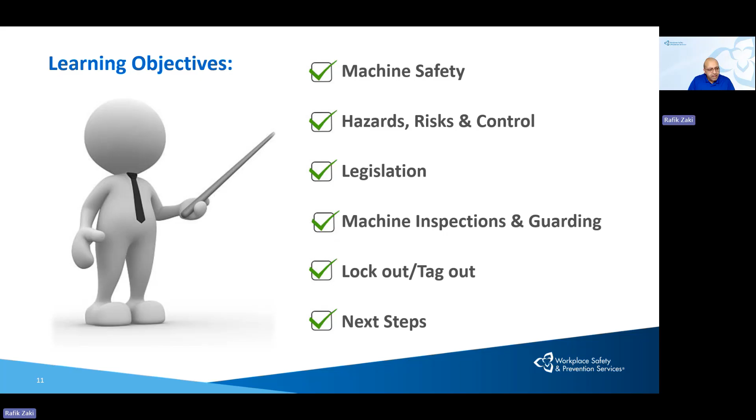We're also going to discuss lockout, tagout. What's the difference between guarding and lockout, tagout, and when we do this and when we do that, and what are the next steps for you as a supervisor. So these are the objectives for today that we're going to discuss.

So let's start with machine safety. Why is machine safety important? Definitely safety is important because it can cause injuries or fatalities for workers that work on these machines. We see different types of injuries, from fatalities on machines up to major injuries and minor injuries. Every injury has different consequences on the workers.

That's why when we talk about machines, we ask: what could happen if? We usually ask this question to ourselves. So you, as a supervisor, when you talk to a worker and you have a machine with moving parts or hazards, you ask the worker: what if you put your hand here? What could happen? Probably it's a very slow machine and nothing could happen. Or probably it's a huge machine with a huge hazard, huge rollers turning around, and it can pull the worker in. So we usually ask this question, what could happen, and this risk is different from machine to machine.

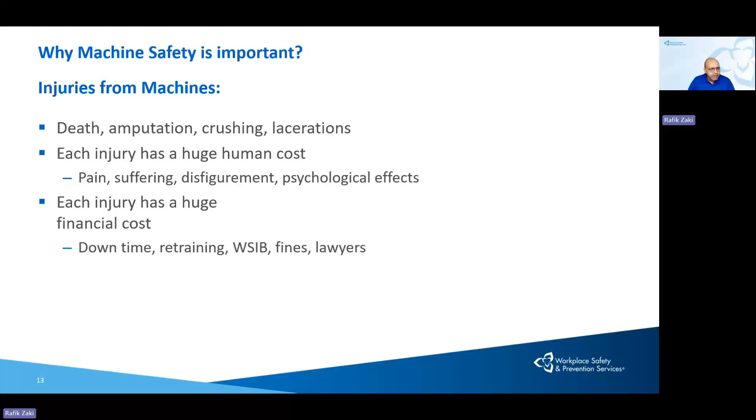What about lockout, tagout? During maintaining the machine, during repairing the machine, troubleshooting the machine, usually lockout, tagout is expected. Why do we need to lock out, tag out the machine? To make sure that the machine parts, or the machine, will not operate during maintenance.

So these are kinds of causes: during operation, during maintenance, during repair, sometimes due to inexperienced workers. You have new employees who are not experienced with the machine, or maybe students or fresh graduates. Sometimes it's due to a worker who is very experienced with the machine. Statistics sometimes show that accidents most often happen with workers who are not experienced, who are fresh graduates or new, or with very experienced people who have worked with this machine for many years and have such confidence that nothing happened before, so nothing is going to happen. So these are the kinds of primary causes for injuries that happen on machines.

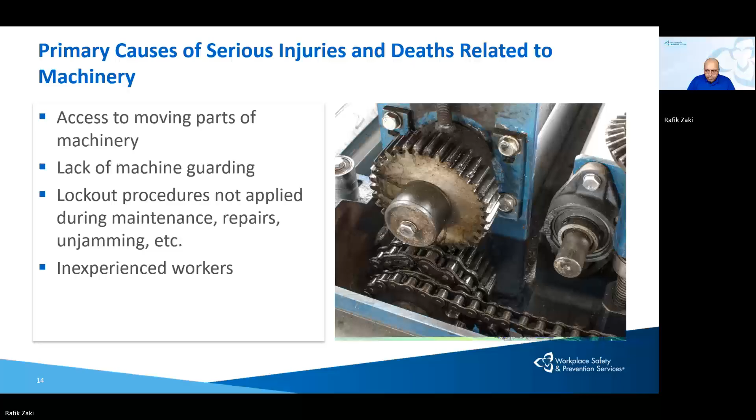All right, what assumptions do we see in workplaces that sometimes lead to an injury? Let's look at some of these assumptions. Give me a thumbs up when you hear this statement before.

No one would ever do this. Anybody heard this before? I see some thumbs up here. Doesn't make sense, but we hear this a lot. We have something and who's gonna do this? People see there are moving parts here and there is a hazard there. Who's gonna put their hands here, right?

What else? It has been like that for years and nothing happened. Okay, I see many thumbs up here. Nothing happened. I'm working on this machine for 20 years and nothing happened. Why? Sometimes they make this statement as a judgment on whether this is risky or not. So sometimes when we sit with customers and do risk assessment, they say no, we're not going to evaluate this as high risk, it's been working like this for 20 years and nothing happened.

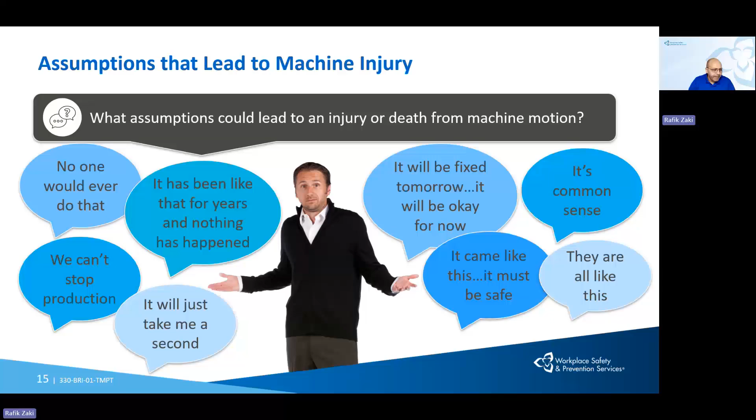They are all like this. So all of these are assumptions that we hear usually after we have accidents or have near misses or something like this. So we actually don't go through this, and usually we proceed with the law and the act and the regulations requirements.

We're gonna jump now to this wording. This is very important, not on machine guarding only, it is for any kind of hazards. So ergo hazard, hygiene hazard, slip, trips, falls, any kind of hazards or risks, we have three important words. What are these three important words? Hazard, risk, and control. What's the difference between hazard and risk?

If you would like to write something on the chat, what do you think is the difference between hazard and risk? Any idea? Just throw some wording. Yes? Yeah, exactly. Yeah, thank you. Exactly. This is all valid answers.

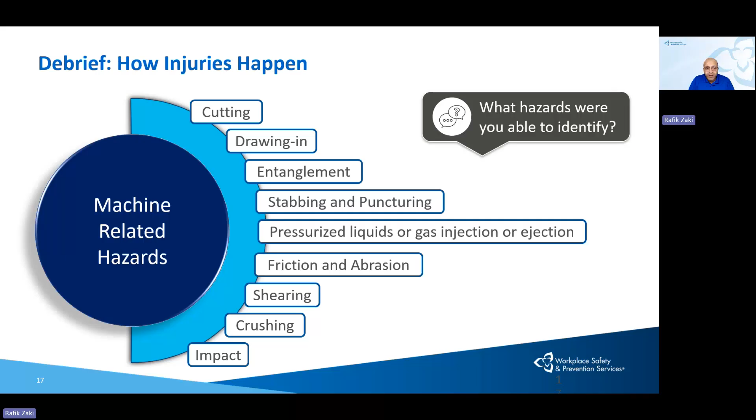But what else? We have also non-mechanical hazards, something like a machine using chemicals or flammable material, explosions could happen, airborne substance, heat, noise, vibration, radiation, biological contamination. All of these are not mechanical or not moving-parts hazards that could be on the machine.

If we have an ergonomic issue, like my worker or operator standing all day doing repetitive movement, or carrying heavy boxes, lifting, ergo stuff, all of these are slip, trips, falls around the machine.

If I have slip trips falls, if I have a forklift working around the machine, and this forklift can hit the workers because it's a tiny space, something like this. Fire, explosions, pressure. If I have live cables on the floor and liquids or water around the machine on the floor, all of these are kinds of hazards.

So what does that mean for you as a supervisor? When you look at the machine and the workers working on it, do you look at this and say, what could happen if? This is very important, to look at the hazard zone or working area and identify the mechanical and non-mechanical hazards around the machine. So these are the kinds of hazards that could come from a machine.

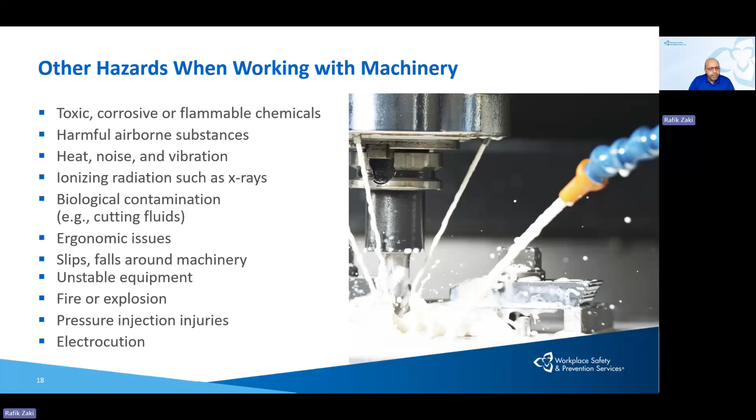Okay, but what about risk? Usually we say risk or risk assessment because, as you said on the chat, it is quantifiable, meaning we can measure it. We have a process about risk assessment called RACE: recognize, assess, control, evaluate.

So what we do first is recognize the hazard. What is the hazard we have on this machine? Then we begin to assess the risk, to measure the risk. How we measure the risk, we're gonna see. Why? Because we want to see the risk level, and based on this risk level, we begin to put the control or recommend the control in place.

And as you said on the chat as well, some people said remove risk, right? Remove risk means we eliminate the risk or substitute the source of the hazard or put engineering controls in place. So the level of control here comes from the risk level.

And then we evaluate the effectiveness. This is very important because sometimes we put the control in place and we still see there is still a hazard or risk in place. So we need to evaluate the effectiveness of the controls that we used. Okay? So: recognize, assess, control, evaluate.

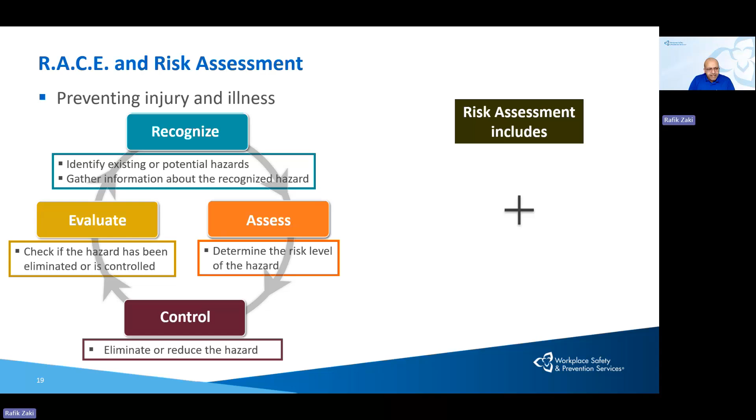When we assess machine guarding, we have a concept called MAC. MAC means if we have moving parts and we have access, we're gonna have consequences. So this is the first question when you do risk assessment: do I have moving parts? The worker has access to these moving parts. What are the consequences that could happen from this access?

Sometimes we say, oh, I cannot do guarding here because the worker needs access. But this is not the end of the story, because for every single machine we can suggest a guard to protect the worker without being an obstacle for the worker to do their jobs. We're gonna talk about this, but this is the concept we use.

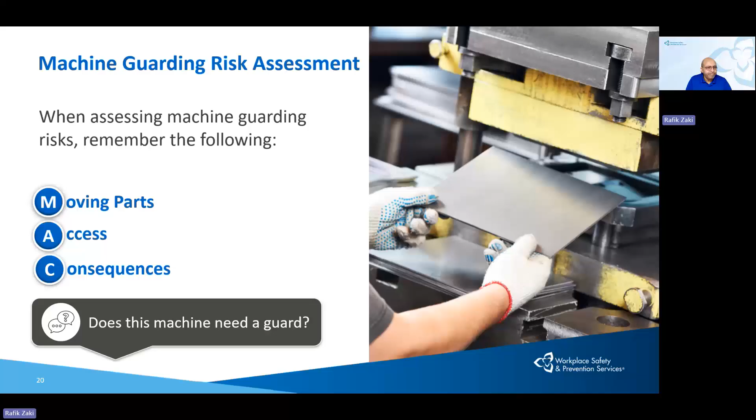How do we do risk assessment and how do we measure the risk? We measure the risk by using some parameters. The main parameter is the severity of harm.

What could happen if I put my hand here? Is it gonna cause a fatality to me, or is it gonna crush my hand, or is it just gonna cause a paper cut for me? No, it's very slow, it cannot do something like this. So this is the question: what is the severity?

And what is the likelihood of the harm? The likelihood comes from two things: the probability of something happening, and can I avoid this from happening or not?

Once we ask ourselves these questions, definitely you as a supervisor, when you talk to your worker, you begin to measure the risk. What is the severity? And for all these answers, this input, the best people to answer it are definitely the workers, because the worker reporting to you is the one standing in front of the machine all day and exposed to this.

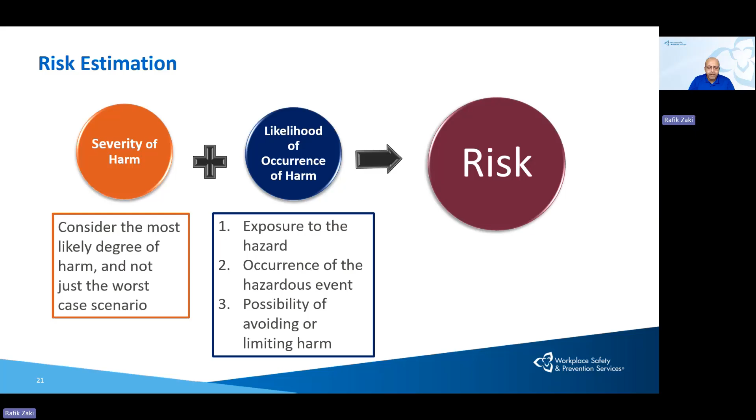Once we measure this, it gives us the risk level. This is one of the matrices that we use to measure the risk. So S is the severity level here. Exposure to hazard: E0 is prevented, E1 is low exposure, E2 is high exposure, and the third parameter is avoidance of the hazard.

Can I avoid this hazard or not? Can I pull my hand away if something happened or not? Can I avoid being in this area when the machine is working or not? So we have A1, A2, A3, and this is the matrix that gives us the risk level.

This is one of the matrices that we use in risk assessment, and this matrix is specifically used for machine guarding. It's taken from an ANSI standard—American National Standard Institute. We have a similar one in the CSA standard, which stands for Canadian Standard Association.

We're going to talk about CSA and ANSI in the coming slides. But this is one of the matrices we use when we measure the risk. Why do we measure the risk? We measure the risk here to begin to talk about the control.

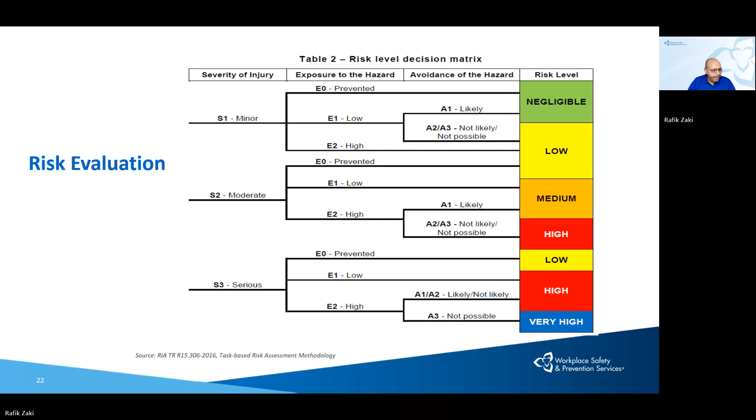Now we're gonna jump into the third word, which is control. We talked about hazard, we talked about risk, we talked about risk assessment. Now we talk about control. We have something called hierarchy of control. What does it mean? It means we need to go into this order when we talk about hazard. So if we have a hazard and we have a risk, then we're gonna begin to talk about control.

If you hear your worker, as a supervisor, telling you, yes, I have this hazard here and I have a risk and I put gloves or I put safety eyeglasses to protect my eyes, you're gonna say no, we have something called hierarchy of control. PPE comes number 6 here.

So let's talk from the start, from number 1. Did you try to eliminate the hazard from the source or not? Or did we think about substituting the hazard or not? I'm gonna give you a quick example for eliminate and substitute.

If you have a saw on your workplace and you're cutting pipes, and you see this saw has a lot of cutting hazards, let's think about eliminating the hazard. Let's think about talking to our supplier to send the pipes or tubes with the right lengths. Then I don't need to use it, so I eliminate the hazard from the source.

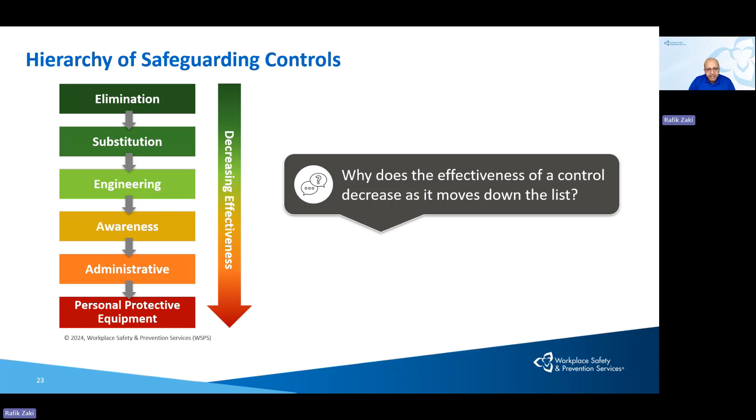Why do we call these high level and these low level? Because these are non-human controls. If I have a safety switch and I open the machine door, the machine will stop - I don't have, as a human, an input on the control level. But here, if I have an SOP, a standard operating procedure, if I have training, if I have PPE, I as a worker have the choice to go with them or not. So this is what we call hierarchy of control, and we look at the effectiveness that decreases down this list. We're gonna jump to legislation, which is the next one here.

This is okay. Yeah, I have a question.

Good question here: is preventive maintenance on a machine considered an engineering control or admin control? The technical part of the maintenance is engineering control. Implementing the maintenance on a frequent basis, having a program and procedure in place, that's admin control. I've gotten this question before. Preventive maintenance specifically has two parts: the technical part, which is engineering control, and the implementing part - the programs, the procedures, how frequent, auditing the programs for effectiveness - which is the admin control. Thank you, it's a good question.

All right, jumping to legislation. So now we talked about why machine safety is important, we talked about hazards, risks, and controls. Now we're going to jump into legislation and what the expectations are from the legislation.

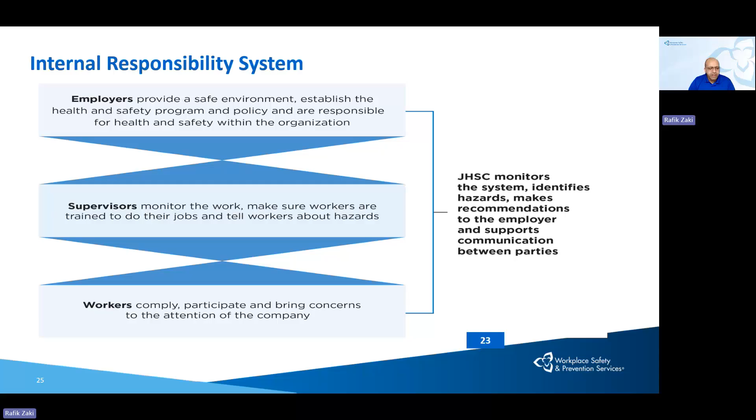Usually when you have a near miss, or something like this, or accidents, there is an investigation - the ministry or the inspector goes through this, sitting with the employer to see where the company stands on safety, sitting with supervisor and workers to see where the violation came from.

If we talk about the Green Book, or the Occupational Health and Safety Act, it has some sections - this is the act, with sections talking about responsibilities for employer, supervisor, and workers. Then we have regulations, and since we're talking about machine safety today, we're going to talk about Regulation 851, which is the regulation covering machine safety. Then we have a layer called standards - as you remember, we mentioned CSA, ANSI, ISO. These are the standards or guidelines that help us meet the requirements here.

So I'm going to give a very quick summary about this structure.

The act and the regulation here are law. It's mandatory, it's shall language. Shall language means it's black and white, okay? Standards here are the guidelines to meet the requirements of the act and regulations, okay? So I'm gonna give a quick example about this.

The act, for the employer, section 25 says the employer must provide a safe work environment, okay? Period, that's it. They didn't give more clarification, okay? Regulation 851 begins to go through this, telling you if you have exposed moving parts, you should put guarding in place, okay? Section 74 to 76 talks about if you have lockout, if you have maintenance or repairs, you have to do lockout, tag out, okay?

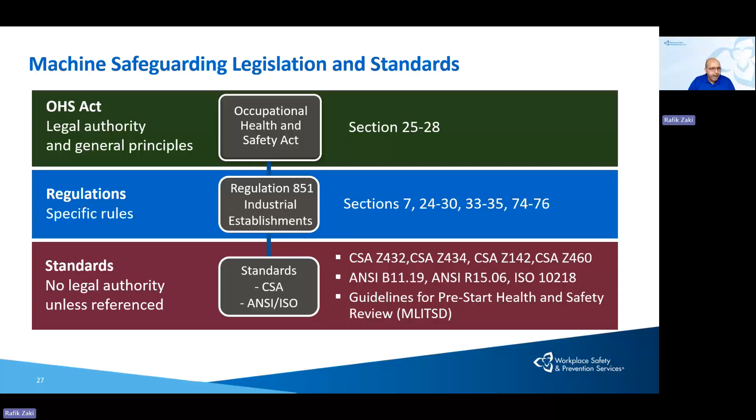All right. And we definitely have guidelines for pre-start health safety review, MLITSD, from the Ministry of Labor. So these are like a summary about the act. So these slides are gonna give you an idea about what I just mentioned now.

Section 25 and 26 from the Act talk about employer responsibilities. When we talk about employer responsibilities, what are the employer responsibilities here as per 25? And this is again talking generally, not machine guarding specifically, but definitely it's applicable for machine guarding. Provide and maintain safe equipment, material, protective devices. Ensure safe measures are followed. Provide information, instruction, and supervision.

Appoint competent supervisor. And we want to talk about competent supervisor - what does it mean, competent supervisor? Take every precaution reasonable in circumstances. This is 25-2H. 25-2H is a very important one. And please remember 25-2H, because you're going to see it also under supervisor responsibilities, and provide written instruction. Okay, so again, these are very important here.

Can you put in the chat your thinking about this statement? What does it mean, appoint competent supervisor? What does it mean, competent supervisor? What do you think?

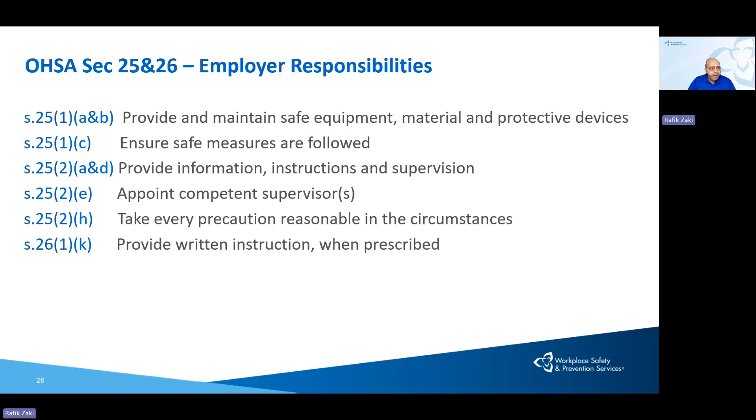Good question. So these are the responsibilities for the employer. Then we jump to section 27, talking about supervisor responsibilities. Supervisor responsibilities means you are the connection between the employer and workers. So as a competent supervisor, you ensure that your workers are safe.

You ensure that they have their PPE, that they are aware of the dangers and potential hazards, that they have their instructions and are trained. Again, this is the General Duty, 27(2)(c), that showed up on the employer side too - take every precaution reasonable in the circumstances. This is what we call the general duty clause. You can't say, 'where in the green book does it say I have to do this?' Once you notice there is a hazard and a risk, you are required to take every precaution reasonable in the circumstances.

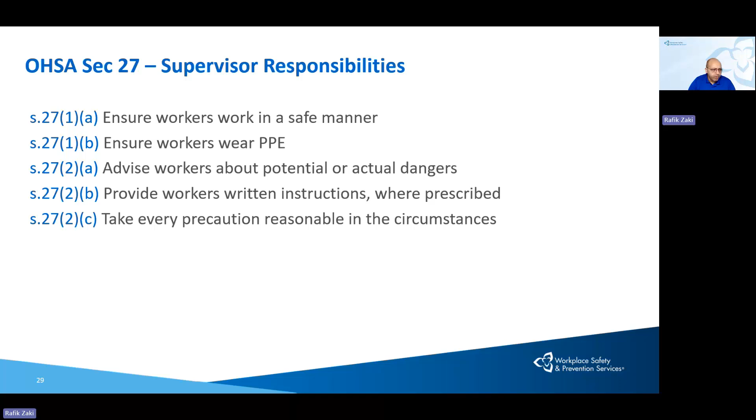This is what we call the due diligence of competency. Workers have responsibilities to work in compliance with the Act and regulations, to wear the equipment, the PPE, and to use the safety devices, to follow instructions, not to bypass any safety devices, to report hazards and violations, and not to remove any protective devices prescribed by the employer and supervisor, and not to operate in any way that endangers themselves.

As we know, workers have the right - and you as a supervisor are also a worker - they have the right to know, to participate, and to refuse unsafe work. I stress unsafe work. Don't refuse work, because when I ask this question, people say 'refuse work.' No, refuse unsafe work, not refuse work. So right to know what? Right to know about the process, how their machines work safely, what the hazards are on their machines, what the risks are, and what controls they should have to make sure they are safe.

And, you know, these are the fines and penalties - an individual now can get up to 500,000 fine, a corporation up to 2 million, and corporation directors or officers up to 1.5 million.

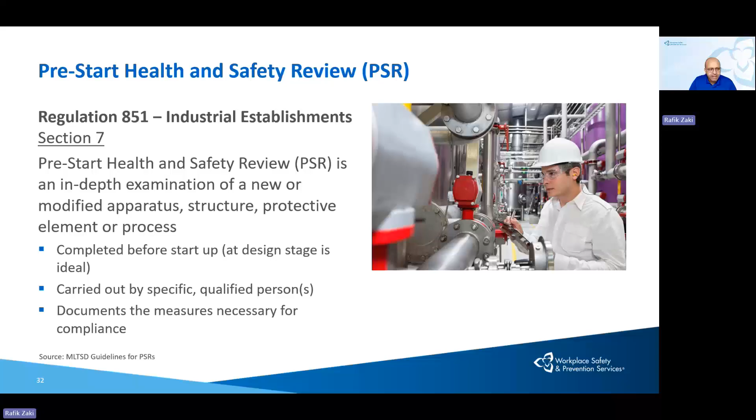Perfect, okay, so we're going to talk about machine guarding. Regulation 851 - we talked about the act, sections 25, 26, 27, 28. Now we're going to jump into regulation, some sections from regulation 851. We talked about section 7, covering pre-start health and safety review.

Section 24 talks about an exposed moving part that can cause injury must be guarded to prevent access to the moving part. For example, as you see here on the photo, a fixed or interlock guard. Anybody know what's on the photo here?

Just write in the chat, does anybody know what this is? Did you see this at your workplace? Do you have one of these? Yeah, safety gate interlock - yes, interlock.

It is an interlock. As you see here, if you open this door, it's going to open the circuit and stop the machine or whatever is behind this guard. If you have a robot or something, sometimes this interlock has a mechanical lock on it that prevents the door from opening when the machine is running. Other times there's no mechanical lock, and you can open it, but once you open it the machine stops immediately. Okay, this is section 24.

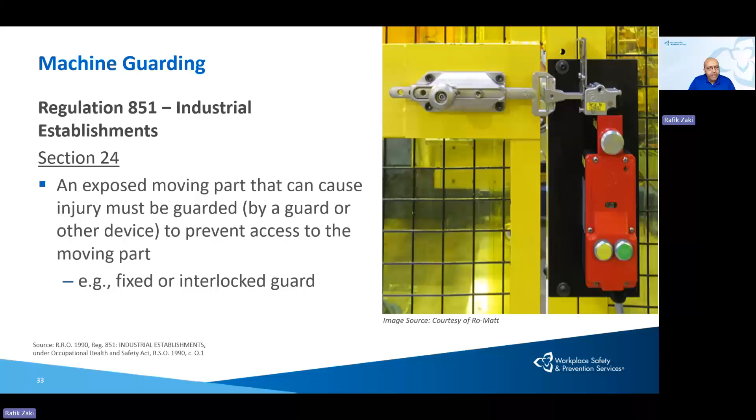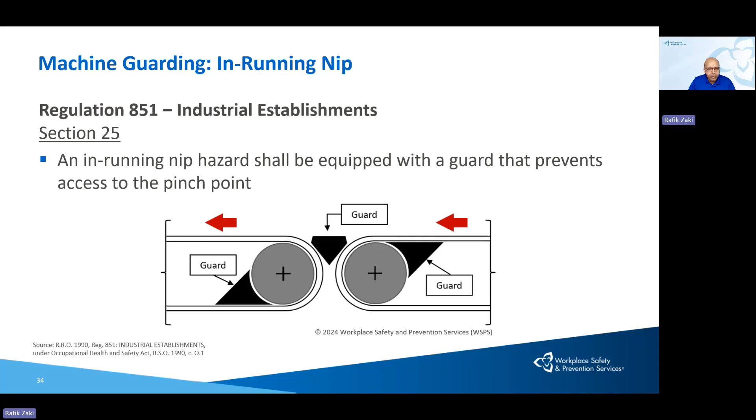What does section 25 talk about in regulation 851? In-running nips. So if you have an in-running nip, you need to put guarding in the rotation direction so there's no hands getting entangled or pinched there.

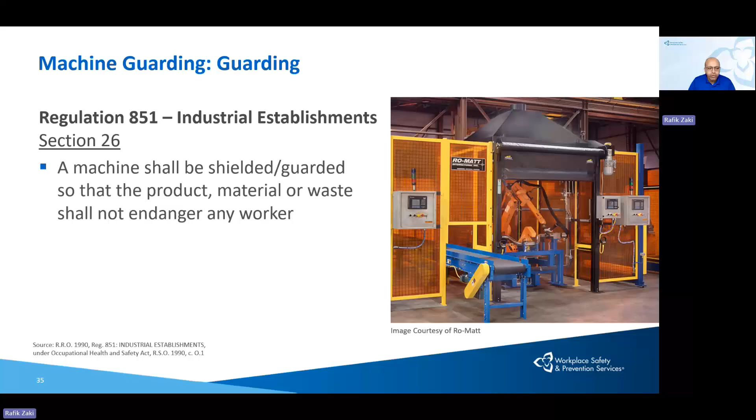Section 26 talks about projectiles and flying material or waste, like if you have welding, or if you have a robot and things can fly off it, you have to put guarding around to make sure it's not going to endanger the workers.

Section 27 talks about emergency stops, but it doesn't give all the details - it just says it has to be easily accessible and identified. Some questions we get: are these shrouds okay around the e-stop? These shrouds are okay now. In the old version of the standard, these shrouds shouldn't be there, but in the new standard they now allow these shrouds to make sure it's not pressed by mistake.

But these shrouds must be built in a way that they do not prevent the worker from pressing it with their palm, their hand, or sharp contact, or similar. So it has to be easily accessible. If I put these shrouds or guards around in a way that prevents the worker from pressing it in case of emergency, then these shrouds are not suitable. So this is section 27.

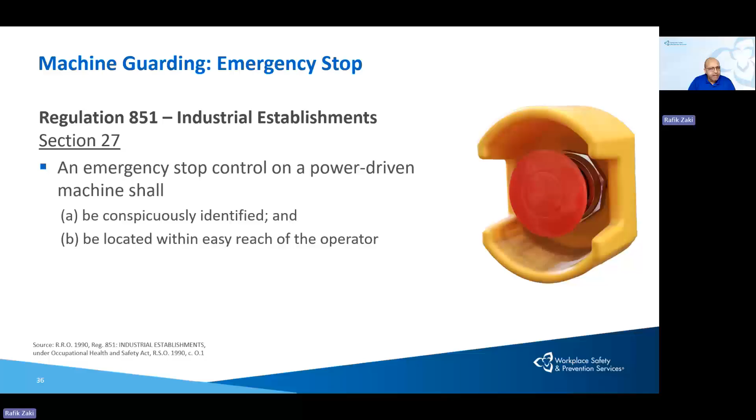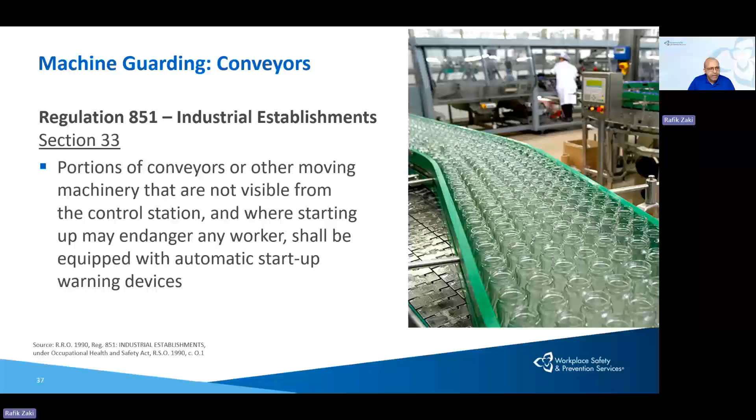Section 33 talks about portions of conveyors or other moving machinery that are not visible from the control station, and where starting up may endanger any worker, shall be equipped with an automatic startup warning device. This is section 33.

Sections 75 and 76 of the regulation talk about lockout tagout. So hazardous energy - if we have hazardous energy, that means it needs a lockout tagout and securing the stored energy as well.

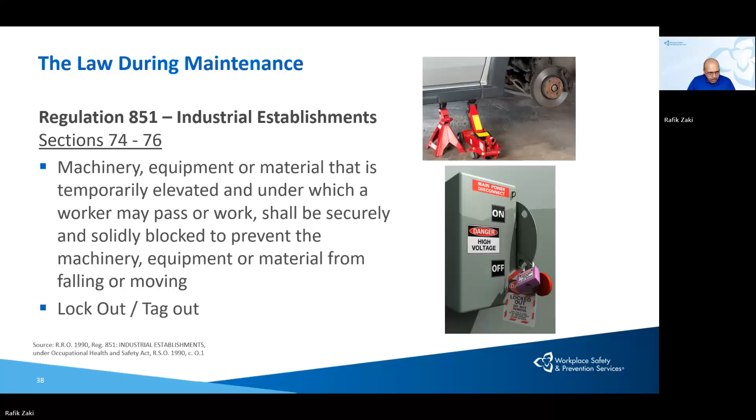All right, before I move to standards, I think we have questions here. Okay, if we take the guarding as an example, does it have to come with a machine?

To have the additional consideration - if we're talking about guarding, if you mean fixed guarding or fencing, this does not trigger a pre-start health safety review.

Now let's talk about guarding. If you're buying a machine with guarding, we consider that the machine builder built this guarding according to the standards and it meets the requirements. So as an end user, you need to look and assess if this guarding is built according to the requirements or not. But if you have fixed guarding, fencing, mesh, or panels, that does not trigger a PSR. PSR is only for cases with a safety device - electrical, a safety circuit, something electrical or electronic that stops the machine. Emergency stop and fixed guarding do not require a PSR, but you still need to do an assessment to make sure it's built and prevents the worker from accessing moving parts. We'll talk about this more in the coming slides.

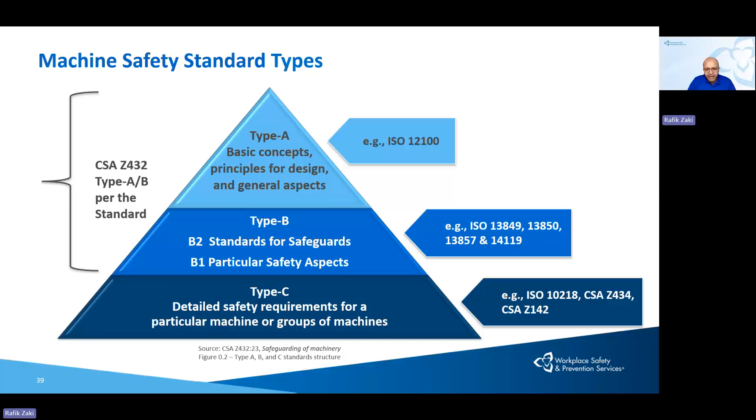Now we talked about the act and regulations. Now we're jumping to standards. Standards are the guidelines to meet the law requirements. I'm not going to go through this in detail, but as you see here, we have three types of standards. Type A is the generic one. So back to your question, we need to make sure the guarding is built according to one of these standards - CSA Z432 has guidelines on how high and how big the guarding should be, with a lot of details. Type B is a standard for safeguards. Type C is a machine-specific guard - for example, robots or presses - but Type A is for any machine.

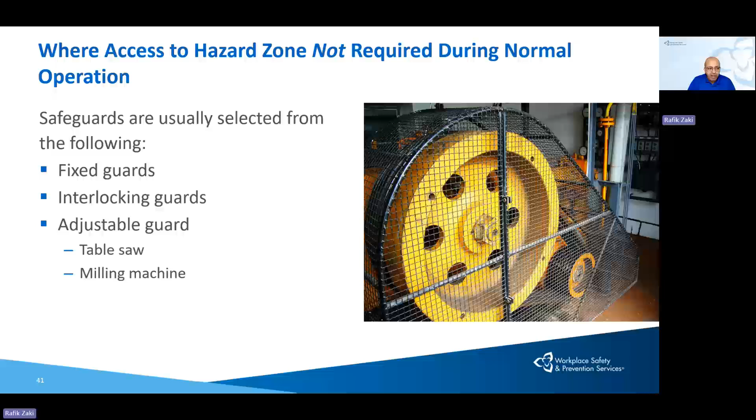We're going to talk about machine inspection and guarding. This is an example of what we call fixed guarding. Sometimes we have interlocking guarding, sometimes adjustable guarding. What does fixed guarding mean? It's a very important thing - it has to be permanent, meaning by welding or by fasteners that require tools.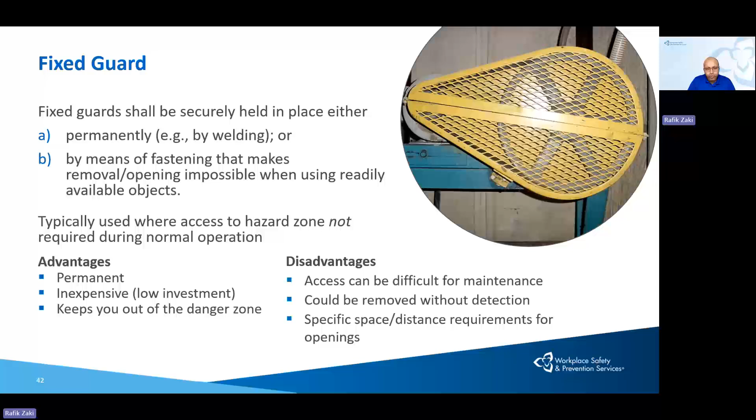What are the advantages? It is permanent, it is not expensive, it does not require a PSR. But the disadvantage is that every time you need access, you need to lock out the machine to disassemble this and do your work. This is one type of guarding.

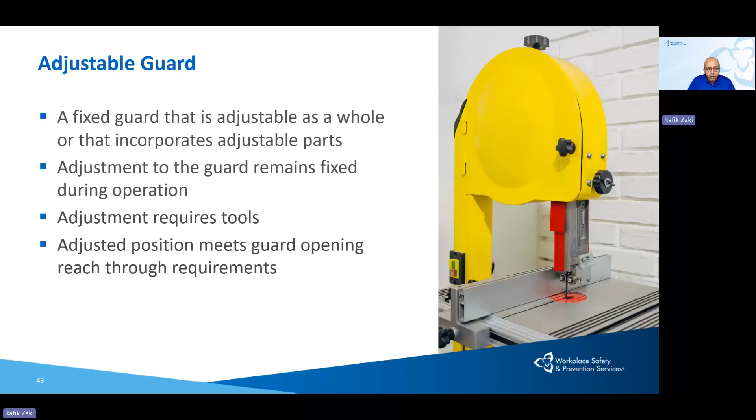Another type is adjustable guard - something like this, where you need to move the guard up and down around the blade to make sure it's covering the blade. So you're adjusting it using tools as well.

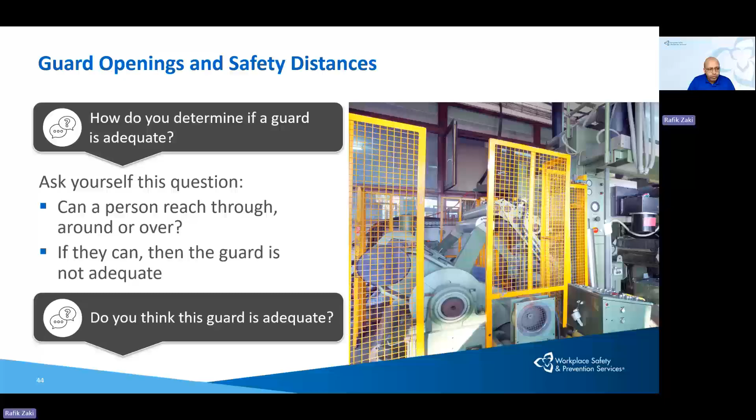Very important - if we're using fixed guarding, and this goes back to your question - the first question we ask is: can a person reach through, around, or over? If they can, then the guard is not adequate.

That takes us to a table in the CSA standard Z432, the machine guarding standard, that gives you the relation between the opening size and the horizontal distance to the hazard. It gives three options: round opening, square opening, or slotted opening, and what the opening size should be. I don't want to get too technical given the time, but this is a screenshot from the table in CSA Z432.

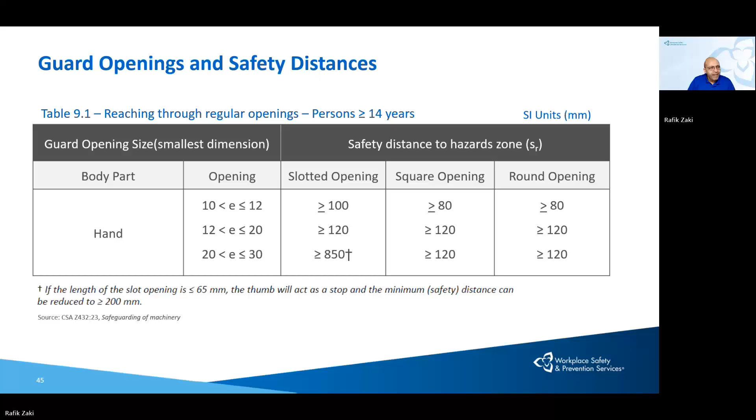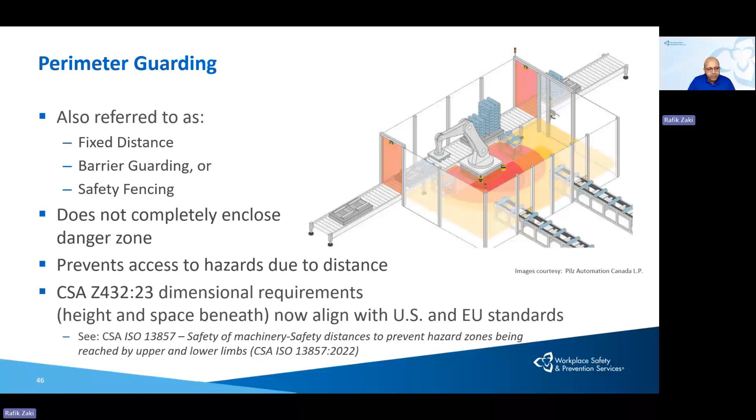What are these dimensional requirements? The height of this fence shouldn't be less than 55 inches or 1.4 meters, and the opening to the ground shouldn't exceed 7 inches. Again, all of these are from the standard. It's very important that you, as a supervisor, make sure that when you have fencing or perimeter guarding like this around machines, it's built according to the standard requirements.

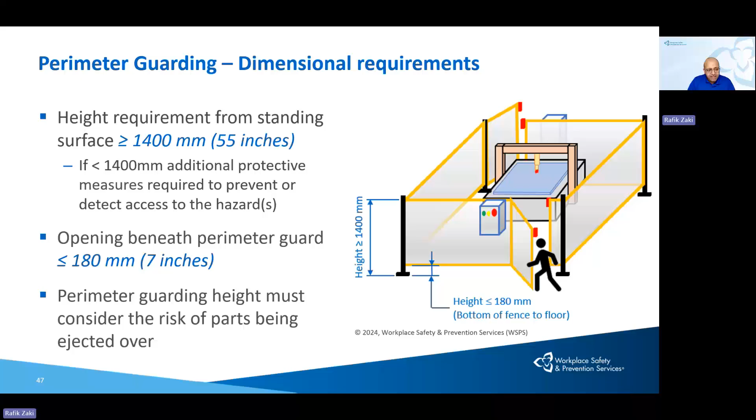That's why the CSA standard now included something called whole body access. Whole body access is two things: if the opening on the guarding permits the entire body to enter the safeguard space, and there are some areas within the safeguard space that can remain undetected. If this happens, that causes accidents, and the new standard now begins to put in place some measures to prevent this from happening.

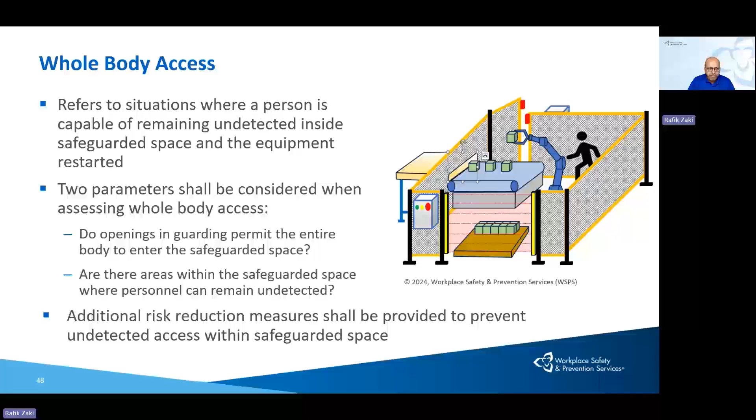Something like if I get inside through the light curtain, I have to blank the beam and put a lock so nobody can operate the machine while I'm inside. Or I put some sequential reset button inside so my colleague cannot reset the safety system from outside until I reset from inside, and so on. A lot of technical details I don't want to go through now, but if you want to keep this in mind, this is what we call whole body access.

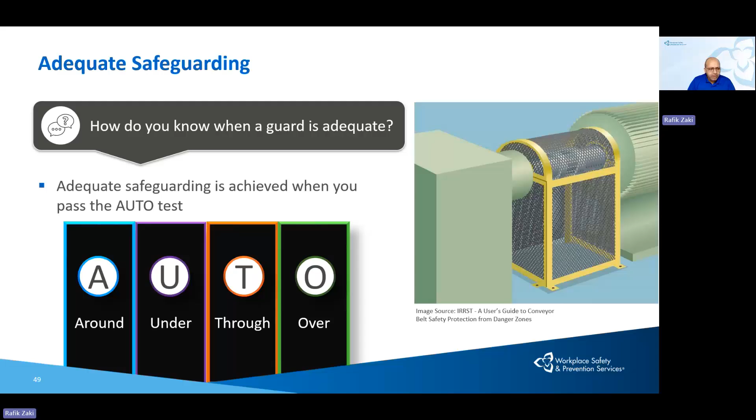Whole body access. All right. When we know that the guard is inadequate - if the worker can access around, under, through, or over and reach the hazard's motion, then my guard is inadequate. Please keep this in mind, we call this the auto principle: around, under, through, or over. This is about fixed guarding.

So what we talked about with fixed guarding is it has to be welded or use fasteners that require tools, and it has to have specific dimensions, specific openings to make sure that it's not allowing access.

Now we're going to talk about interlock guarding. What's interlock guarding? Interlock guarding means that this guarding has a specific switch. Sometimes this is a mechanical switch, like the ones I talked about. Sometimes it's a magnet switch or non-contact switch. Sometimes it's coded, uncoded - we have different types of safety interlock switches.

In this phase, it begins to trigger a PSR, because now we have a safety switch. So this is the safety interlock switch, and opening this guard interrupts the operation of the equipment, preventing access to the hazard.

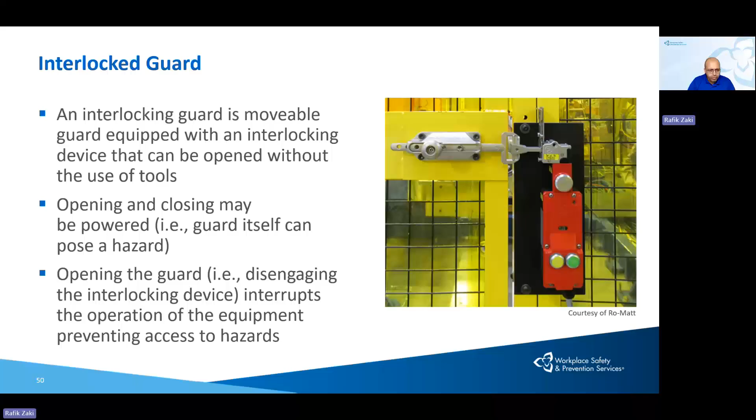Light curtain, sometimes we call it PSD, presence sensing device. Light curtain - again, once we interrupt the light curtain, the transmitter and receiver, the machine stops immediately. After you interrupt the light curtain, you need to go back to the panel and reset the safety function to restart the machine.

We have different types, and these different types are selected based on the risk level. The higher the risk, the higher the type we need to put in place. The only piece I want you to keep in consideration is that the distance of these light curtains from the hazard is specified by an equation that needs to be calculated based on the stopping time. So sometimes if the stopping time is very high, this light curtain needs to move further back to make sure that if I cut this light curtain, the machine is going to stop before I reach the motion.

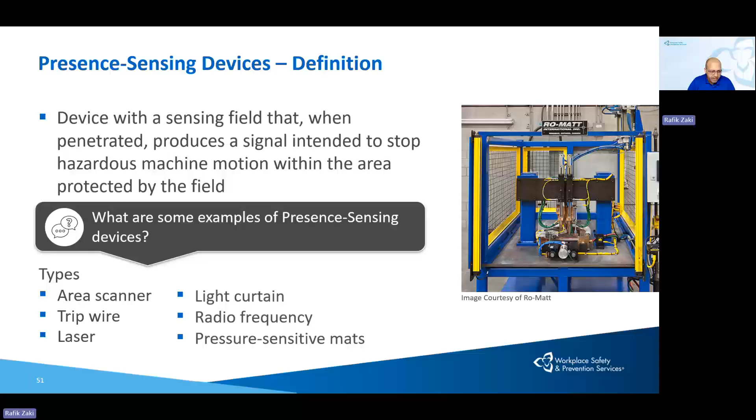Safety scanners are the same idea as light curtains, but the difference is the transmitter and receiver are built into the safety scanner. The good thing about this one is it's programmable, reprogrammable. Sometimes we program it in a way that we mark the floor - for example, if somebody comes into the yellow zone, the machine is going to slow down, but if somebody gets into the red zone, the machine is going to stop immediately. So this is the safety scanner, but again, this is a safety device that's still triggering a PSR.

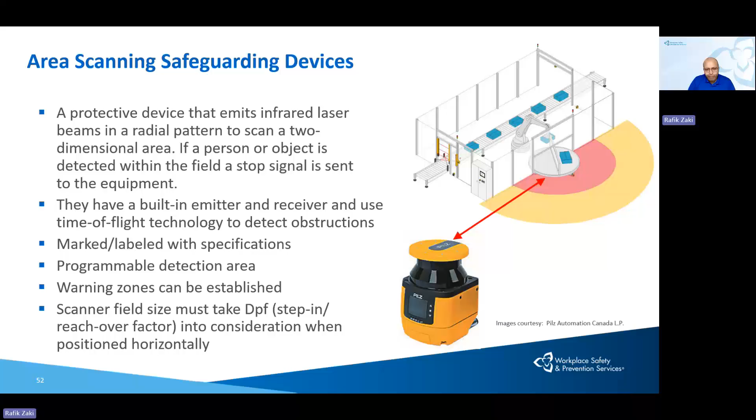So all of these are safety devices. Their level of protection exceeds the level of protection of an emergency stop. That's why we call this a safety device. The other one is the emergency stop, which is an emergency device.

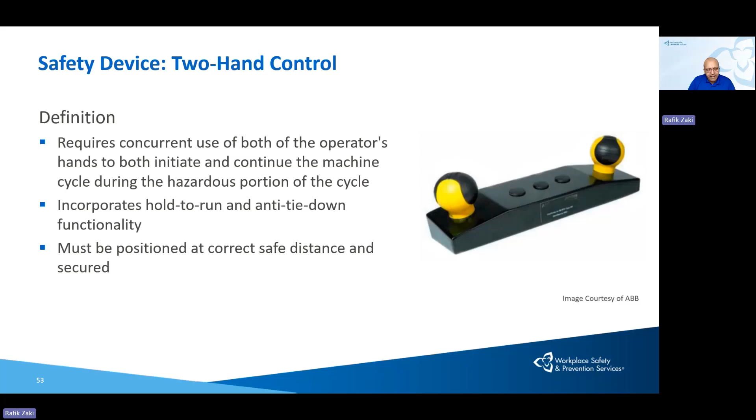Two-hand operator control - I don't know if anybody in the group here has two-hand operator control, but this kind of needs two hands to energize the machine, and this is the least we use because it protects the hands only and protects only the worker who's using it, but doesn't protect others as well.

So this is about machine guarding and the safeguarding that we're sometimes using. Now we're jumping to lockout tagout.

Lockout tagout is required if the machine is not in operation. So any machine phase or life phase other than operation, the expectation is lockout tagout. Sometimes we cannot do lockout tagout. We need power to do troubleshooting, or we need power to do something, like clearing a jam. I don't need to lock out, tag out.

This is another story, that we do risk assessment for these tasks. This is another session we can talk about later, or if you have questions, you can contact me about this.

But if we're not able to do lockout tagout, and we do something called minor service where I need power on it, we have to do a risk assessment, using the risk matrix I showed you, to make sure we have the right controls in place and meet the same risk reduction level as lockout tagout.

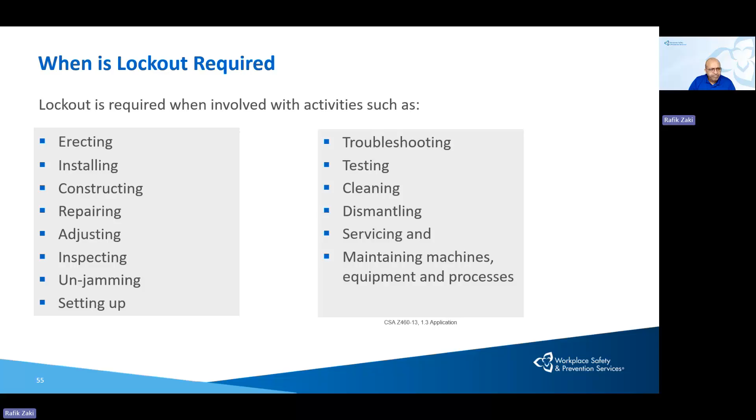These are the kinds of hazardous energy we make sure to control, so it doesn't hurt the worker during repair or maintenance. We have electrical, hydraulic, pneumatic, kinetic - kinetic means something keeps running after we disconnect the power - potential, like something hanging with potential energy, thermal energy, radiation, chemical, and so on.

So these are different energy forms. It's very important to know that when we talk about lockout tagout, we talk about two things: the source, how we isolate the source feeding the machine. For example, if I have electrical, I have a switch that's lockable, I can put a lock on it. If I have hydraulic, how do I secure the hydraulic power unit, secure the compressor, close the valve, and put a lock?

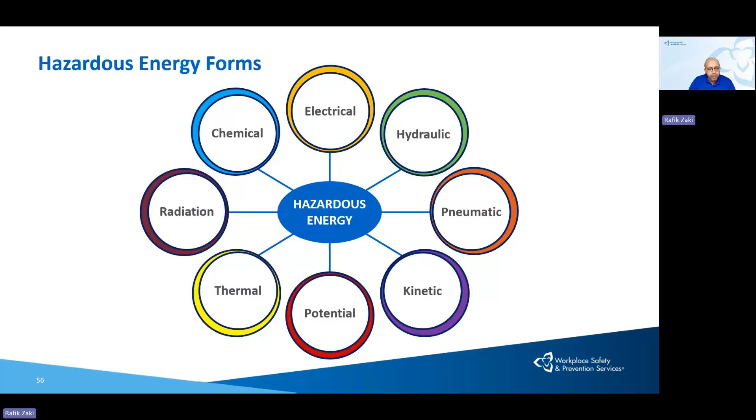The second piece that's very important to consider is stored energy. Keep in mind that when you cut the source to the machine, you still have stored energy inside. So capacitors - if we have any electricians here, you know capacitors store electrical energy. If you have hydraulic, what do the hoses and piping store? How do I release this stored energy to make sure it's not going to hurt the worker during their tasks? So these are things to look at when we do lockout tagout.

We have a standard for lockout tagout, CSA Z460, 2020 revision. The last revision from 2020 has 7 steps for lockout tagout. These are the steps we have to consider in our procedure: prepare for shutdown, shut down the equipment, isolate equipment, control stored energy - this is the one I just mentioned about stored energy.

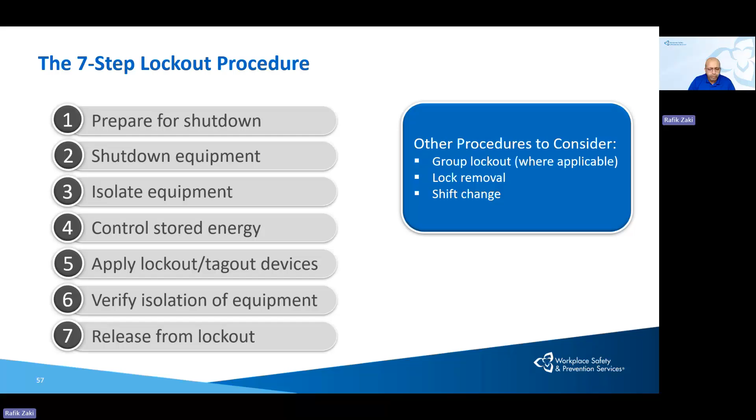Then apply the lockout tagout device, verify isolation of equipment - every step of the first five needs verification. So we verify, and at WSPS we help a lot of customers with these steps and with building placards specific to each machine, outlining the steps from 1 onward until bringing the machine to a zero energy state. I know a lot of our firms and customers are doing this.

All right, I think we still have about 10 minutes, so let's discuss what's next. What do you think? I know I threw a lot of information at you in a very short time, 90 minutes, but what does that mean for you as a supervisor?

When you think about this, what do you think you should do to protect your workers and your team from machines, hazards, and risks? Think about this - what tasks are you going to begin to look after, now that you've heard this? Are you going to observe the team and how they're working on machines?

Do you understand the hazards? Do you have risk assessments? Exactly, thank you for these comments - great comments. Do you have communications? Do you have your worker participation? Do you audit or monitor the process for your workers on machines? How do you engage your workers? These are all questions you may think about.

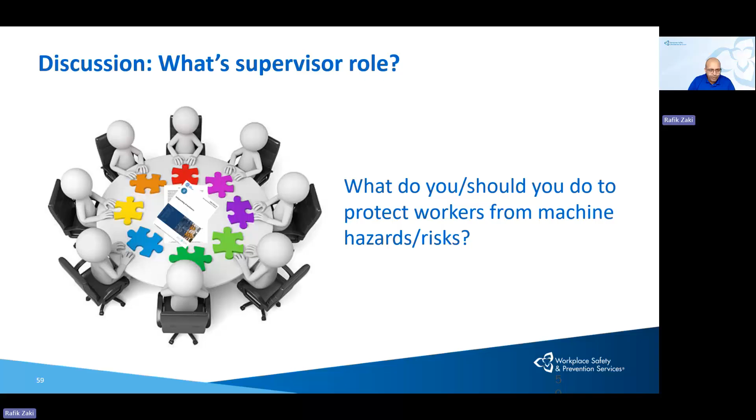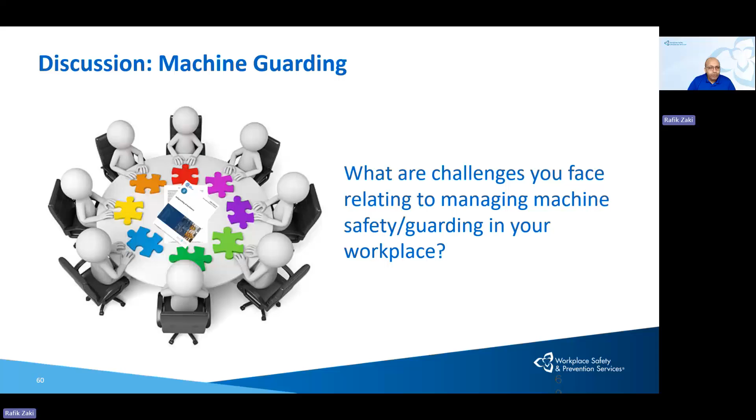What are the challenges you face relating to managing machine safety and guarding? Do you have specific challenges? Do you have input from workers? Do you have support from your employer to identify the proper guarding?

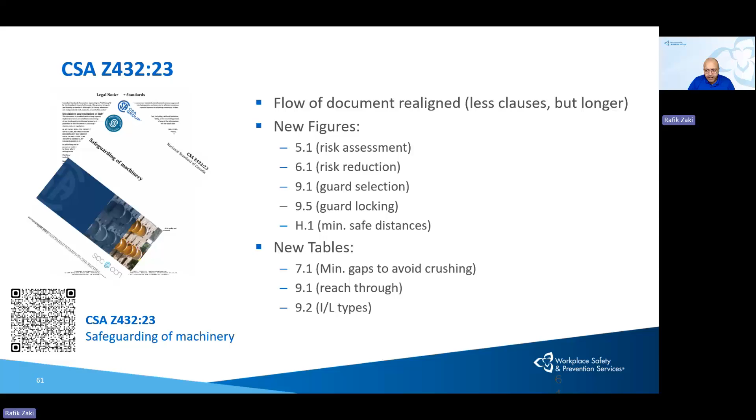CSA Z432 is a great source for risk assessment, risk reduction, and guarding as well. So it's a document that you can use.

Lockout tagout CSA Z460 2020 is a great source also for hazard energy control and how effectively you manage control of hazards. We have a good question here. Should we have a supervisor verify the lockout tagout done right, or leave it to worker training and trust it? It's very important that not only the supervisor, but the employer, puts the right steps for lockout tagout.

Let me describe this quickly. We have two things related to lockout tagout. We have the program or procedure that describes how we do things, how we do the lockout tagout, and this program should be according to the CSA Z460 standard that I just showed on the screen.

But we have something else called lockout tagout machine-specific procedure, or placard, sometimes called a machine lockout tagout placard. It's different from machine to machine and has specific steps: what should be done first, then what should continue, how to continue until bringing the machine to a zero energy state. Every step of this placard has to be verified according to the steps.

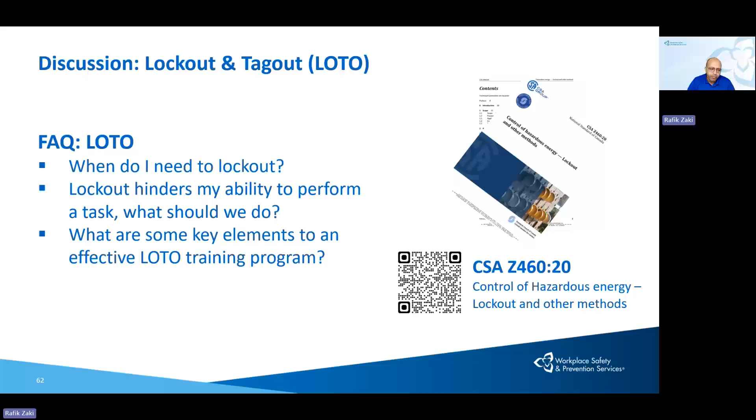It's very important to make sure we do the lockout tagout the right way, because when you tell the worker it's safe to go do repairs and there's still energy inside, that's worse than telling them to watch out for something. You give the worker false confidence that it's locked out and tagged out, go ahead. So it's critical the procedure is done correctly.

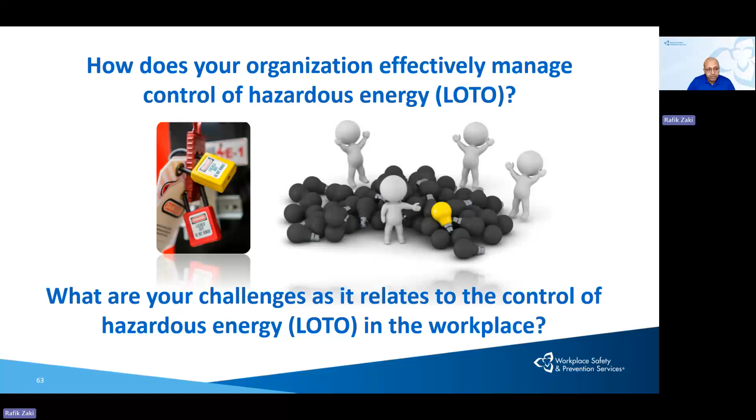This is part of some challenges related to lockout tagout. PSRs, this is a question you're going to ask yourself: Do I have a PSR? Do I need to do a PSR? Is this CSA approved? Does it require a PSR or not?

Again, at WSPS we can help you with training for a PSR. We don't do PSRs, but we do training for PSR engineers and companies that ask about PSR. WSPS has engineers and professional engineers and can technically do PSRs, but due to potential conflict with the Ministry of Labor, we cannot do PSRs ourselves, only deliver the training for PSR engineers.

So I think we came here to the end. Let me check if we have more questions. For handoff from one person to another, for example a worker to a maintenance person, should the maintenance person verify?